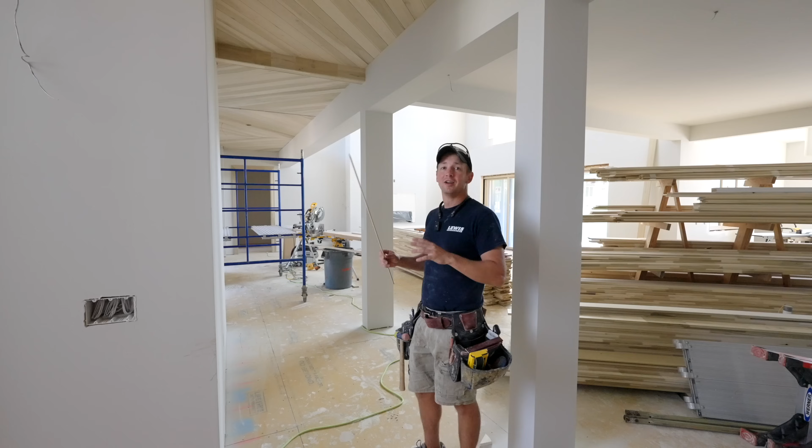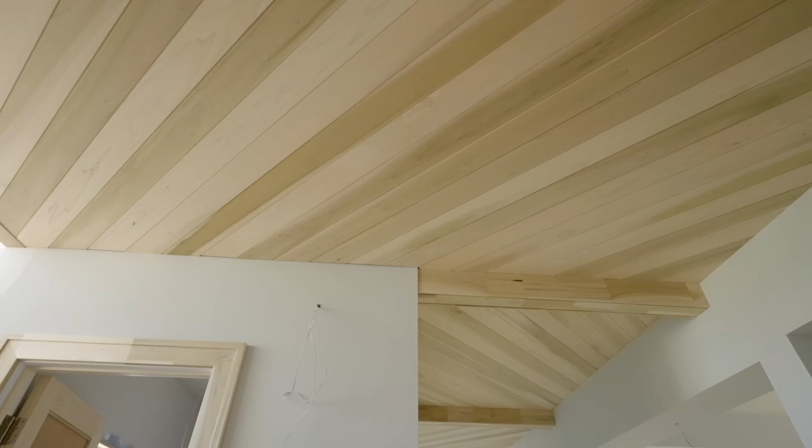For a lot of you guys who do this professionally, you know that details can take absolutely forever, especially those very simple contemporary details. I've got this long foyer here, and we've got nickel gap tongue and groove going on the ceiling, and you'll notice about every 8 feet it changes directions, and it's all cut at a 45-degree angle. I've actually been kind of dreading this aspect of the project for months because I thought I was going to have to fit every piece perfectly tight to the wall and not use any scribe molding.

Thankfully, I was able to talk the architectural designer into using this. So I'm partway through now. I've got a lot of tips and tricks that I've used on this installation that I want to show you.

First off, I want to address the question I get asked a lot whenever I use the term nickel gap. This is actually what we call nickel gap. It's different from shiplap. The profile is a little bit different. Some of you might remember a couple summers ago, I actually did a house with 2 miles of nickel gap just down the street here. So this is the same profile, same material, except it's stain grade and it's in poplar.

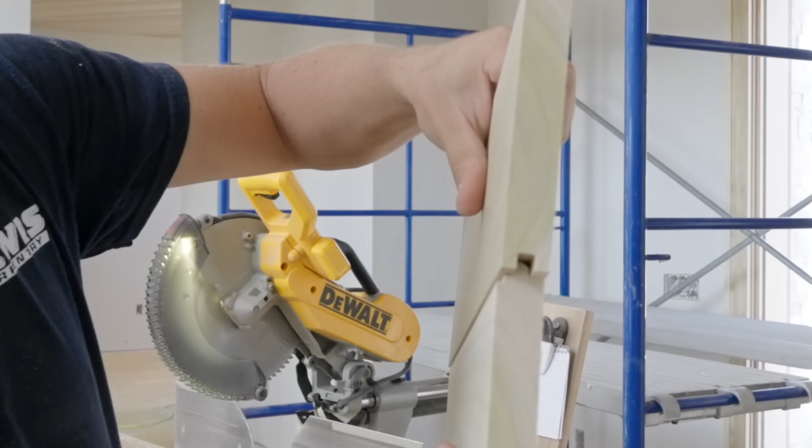The biggest difference with nickel gap is it's got a tongue and groove, and then you'll notice on the front here, you've got a gap that's a little bit thicker than a nickel, and that's why they call it nickel gap. It's a little bit different from shiplap. Shiplap actually has a rabbet on the ends and it overlaps, which requires you to face nail it. With nickel gap, when you're nailing this on the wall, you just nail through the tongue, and whenever you put your next piece on, it covers up your nail hole so you have no exposed fasteners.

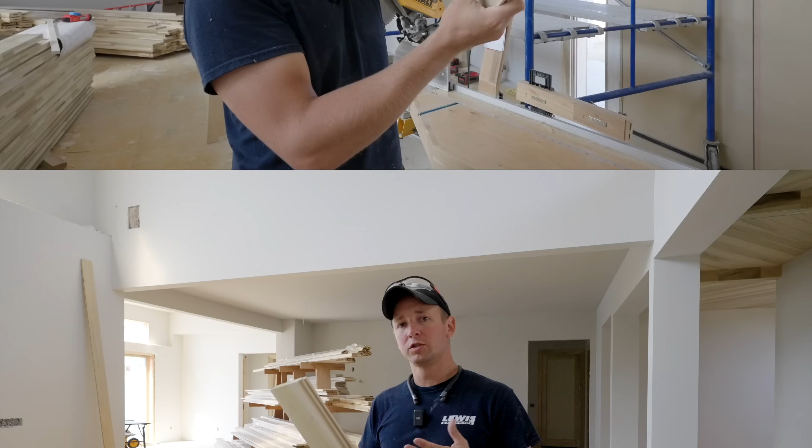So before these big projects, I always submit a quote or a bid for the job with what it's going to cost. And it's a big deal for me to try to do this work in as cost-effective way as possible. And sometimes the simplest details can add a ton of time to the project.

About a week ago, we were on site and one of the designers wanted to take all of this nickel gap and pre-stain it. The reason being, if it expanded or contracted, we didn't want to have basically raw wood showing through. So I actually nixed that idea.

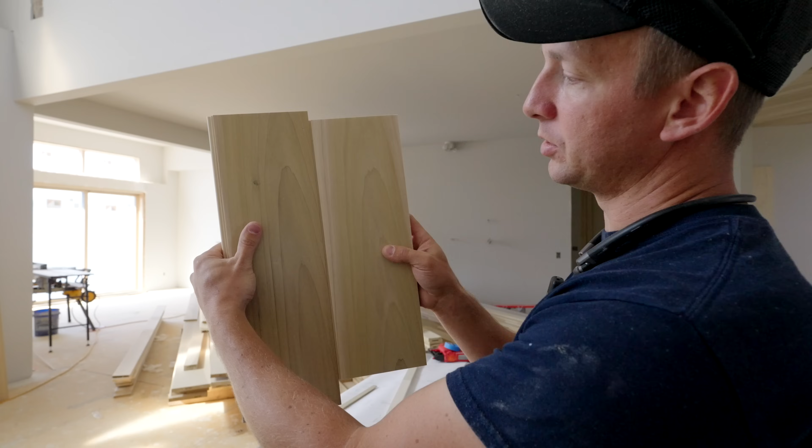The reason was we've actually got this house completely acclimated. The wood's been in here for a while. And if you look at the way this goes together, it's only going to, at most, expand or contract probably a 32nd. And that's just going to create a shadow line. We're not going to have raw wood, in my opinion. So we didn't do that.

That saved me a ton of time. Otherwise, we would have had to have had the painter come in, pre-stain all these grooves, and it just would have made the whole process a lot more difficult.

Whenever I have to bid these jobs and I've got a ton of cutting, a ton of pieces to install, the first question I ask myself is, am I going to be able to batch cut these pieces? Meaning, am I going to be able to set up a stop block and just cut a bunch of pieces at once to the same length and install them? Because that's going to greatly affect my labor.

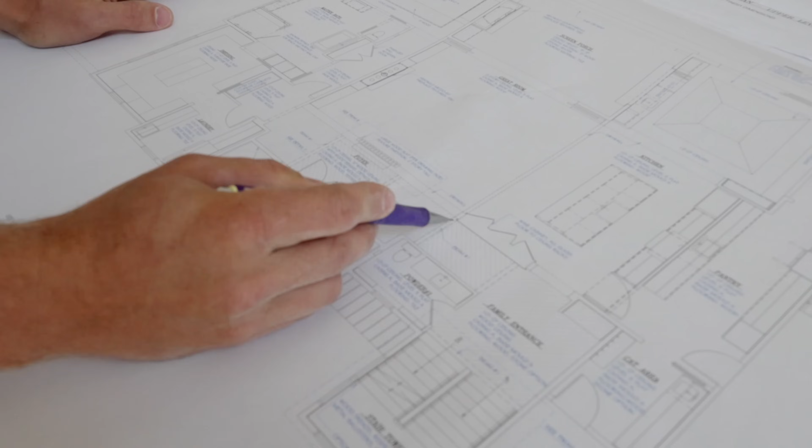If I have to measure and cut every single piece, it's going to take a lot longer. And if I have to measure and cut every single piece and have to tweak some cuts, make recuts and things like that, then it's really going to take a lot longer from a labor perspective. So when I was looking at this print, I knew that this had the potential to take a ton of time because all of these pieces are intersecting with the wall at a 45-degree angle.

So long story short, we were having a conversation a week ago going over the details for this ceiling, and I try to be respectful, but sometimes I have to push back a little bit whenever I realize that I can save a lot of money with a simple detail.

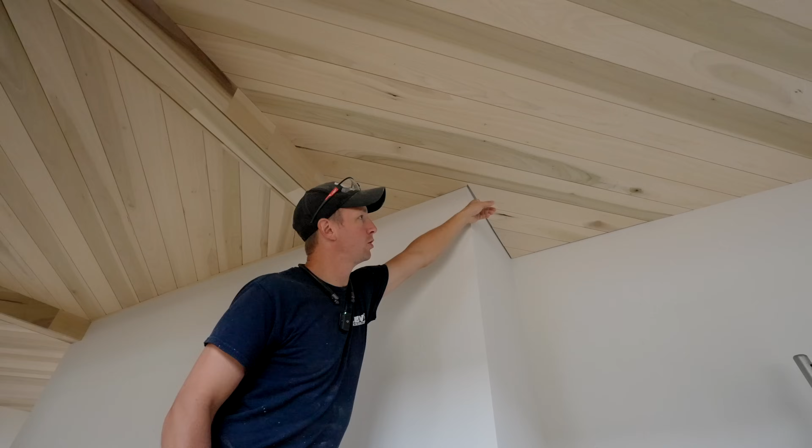So this is a piece of scribe molding, very basic, about a strong 1/8 inch thick, and this guy right here saved thousands of dollars of labor just on this area. The reason is it allowed me to have the ability to batch cut these pieces and not have it be crucial if I'm not getting everything nice and tight, so I can cut really fast and then I'll go back through and install a piece of scribe molding later.

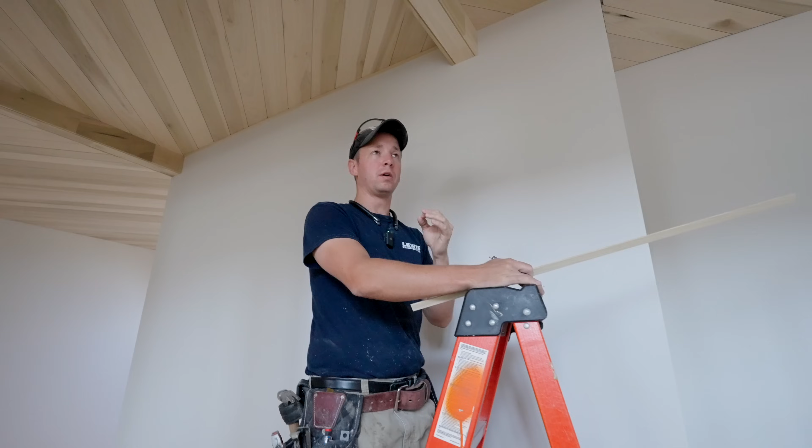If we actually come over here, you'll notice in this area I've already got the Scribe mold installed and it looks fantastic. So by not having to perfectly measure and cut every single piece, it saved tons and tons of hours of labor. So batch cutting is going to save a ton of money, a ton of labor, right?

Well, how in the world are we going to batch cut these pieces if they're running diagonally at a 45-degree angle? It's actually really simple, let me show you how that works. I was able to cut basically a whole section at a time like this without coming back up to measure anything.

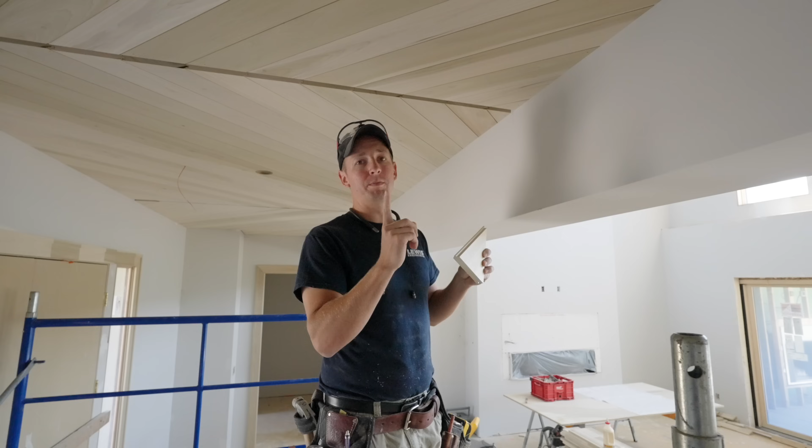To get started batch cutting, all we need is one measurement to start off with. So we're going to pretend a little bit that I'm starting here, that this isn't already up. We're going to start at the corner and work our way out. So I've got my starting piece right here. Now we can start batch cutting.

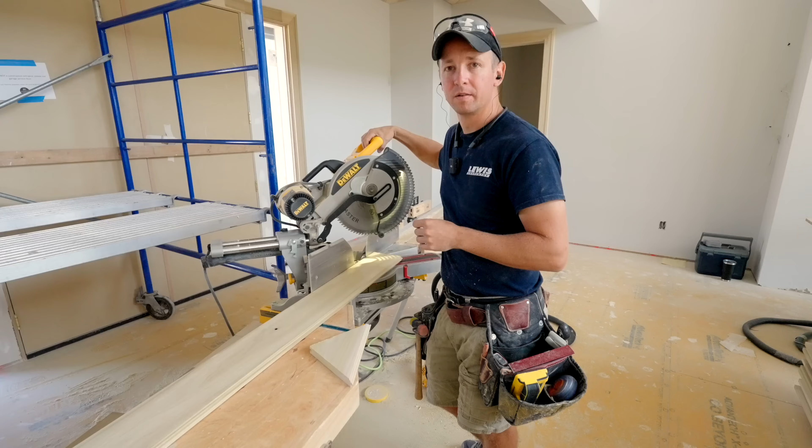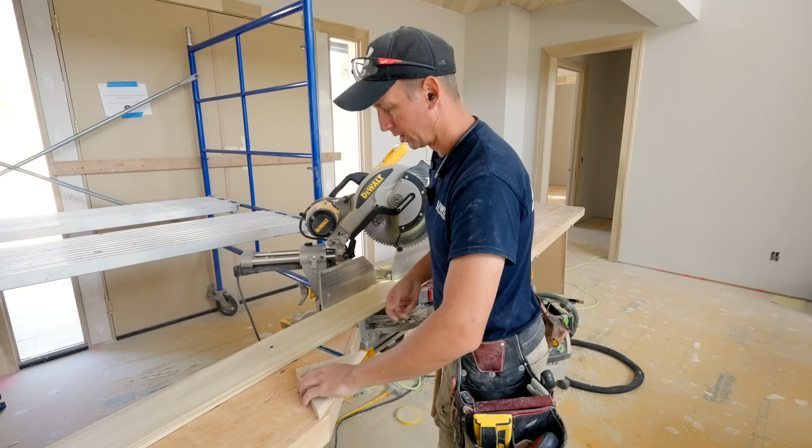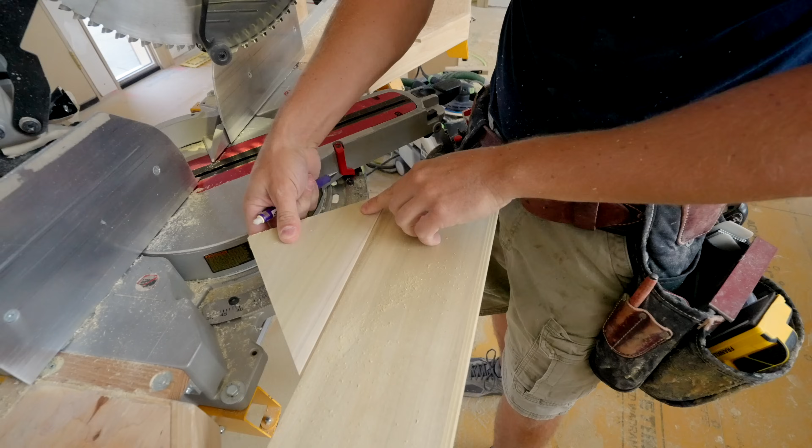So we'll get started by pre-cutting a 45 on one end. Now we'll take our piece that we're starting with and put it in line here on one side. So that's in line. And the nice thing is we've got forgiveness because we're going to use our piece of Scribe molding, and I'll make a line right there. Now I can come over here on this side and we'll batch cut the second piece.

Okay, so now our second piece is done. Now it's time for our third piece. I don't even need to move the saw, I'll just flip the board over. Get that one started. Now I'll grab my second piece.

Do the same thing again. Line it up right there. We'll come over here to the long point and then the short point on our next board. Mark that again. Cut that. One more. Flip. Line it up. Mark it.

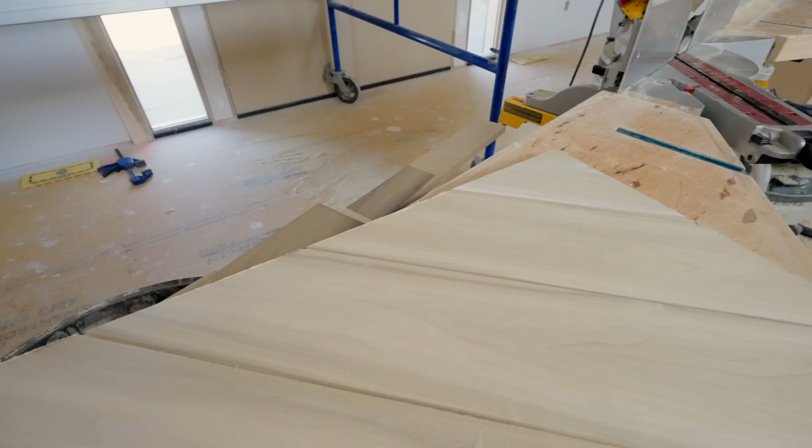There we go. So here we go then. I've got my starting piece here, piece number 2, piece number 3, and piece number 4. Everything's lined up. Again, thankfully we will be able to use the piece of Scribe molding over the end here, so if we're not absolutely perfect, it's no big deal.

But this is absolutely crucial if you want to get something like this done efficiently - to be able to batch cut, number one, but then also to have that measure of forgiveness by using a piece of Scribe molding. I've got nothing against trying to fit something like this perfectly tight. I can do that if somebody wants to pay for it, but we have to educate the client, the designer, the builder, and let them know that if we want to do it that way, it's going to cost a lot more.

So each of these boxes has about 25 pieces. Whenever I price out a job like this, I've learned to count the number of pieces it's going to take, and I know approximately how long it's going to take me to install - to cut, measure, and install a piece onto the ceiling - if I can batch cut and there's some degree of flexibility with the measurement. Usually I can count on about 10 minutes per piece, just as a general rule.

Now, if you take an install like this and I have to precisely cut every single piece, measure it and cut it, it's going to double the labor. So it's not a matter of, can a client like this afford to pay me to do that? Of course they can. It's more of a question of, can we take that labor and put it into another detail so they're getting more for their money?

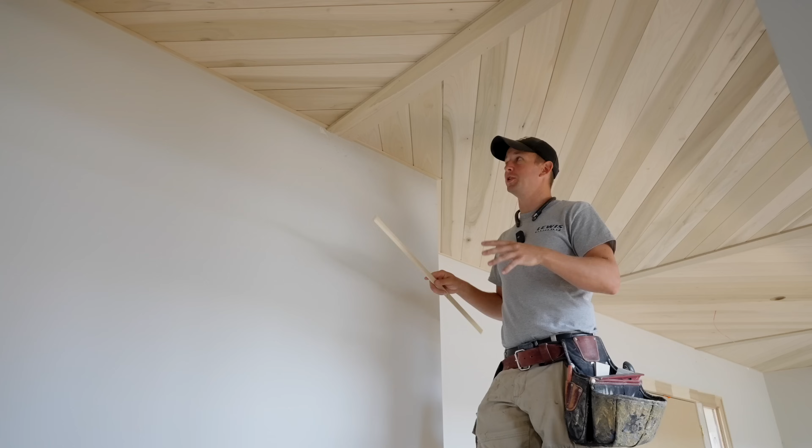Hey guys, we're actually a couple days forward in the future right now, and you'll notice the beams are no longer here. A series of events transpired that caused the beams to be removed. I'll cover that more towards the end of the video, but there was one more thing I forgot to mention before when we shot this the other day.

This scribe molding, there were a variety of reasons I pitched this, that we wanted this, and I forgot to mention a key point: it gives you a perfectly straight edge for the painter to cut his paint to. If you don't have that, you have all these little notches in the nickel gap, and whenever it's stain grade, it's really hard for the painter to cut a line and get a nice looking transition between the wall and the nickel gap. So putting that scribe molding on there gives you a nice straight line to cut to.

All right, enough talking about how to efficiently do this—let's get to cutting some wood. These are some beams, and these are breaking up the sections where the direction changes on this shiplap. We've got this broken up into sections. You'll notice over here I've got a lot of forgiveness underneath these beams, so that's another thing that helped me be able to production cut all these pieces really quickly.

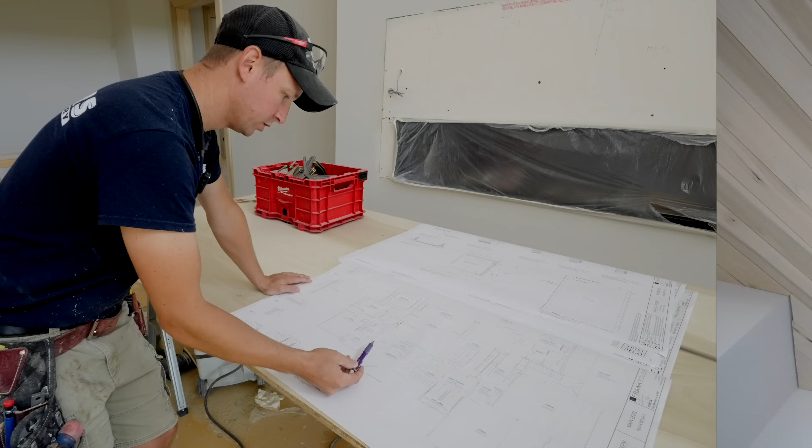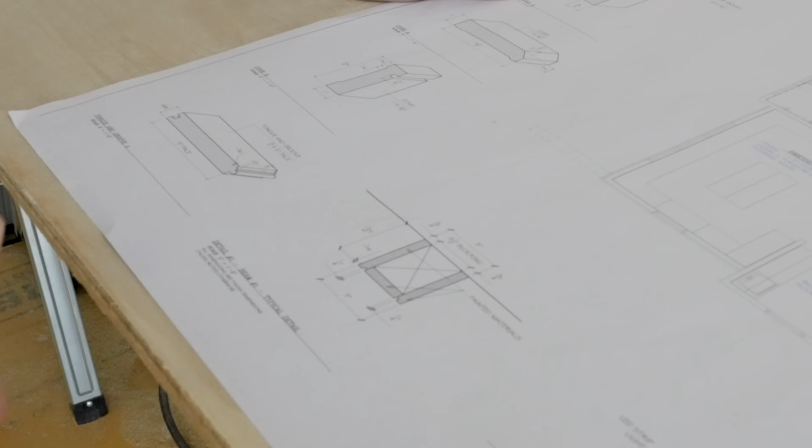So you'll notice here in our foyer area, it's got our diagonal nickel gap noted, and then there are four beams—1, 2, 3, 4. Down here they've got the specs on what I'm supposed to do for those beams. We've got a 1/4 inch rabbet detail on the bottom here, and the beam is assembled flush across the bottom. So I'll just be taking a piece of 3/4 by 3/4 blocking and putting it on here, and that'll allow me to nail this centerpiece up into the side beams.

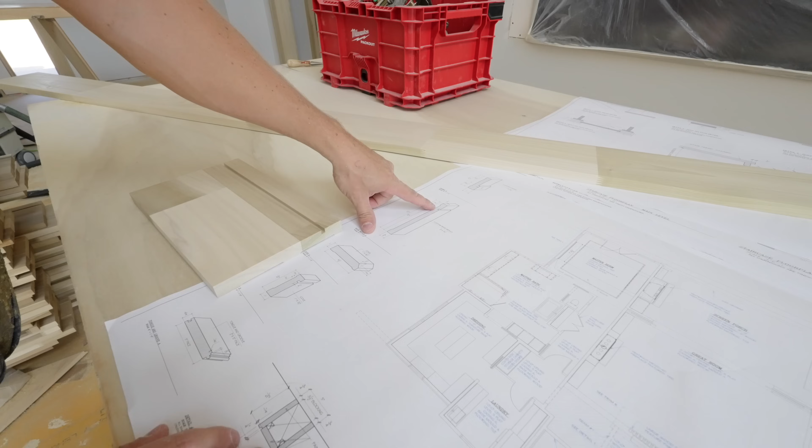The reason we have this rabbet detail on our beams is because it actually matches the baseboard. This is our baseboard, and it's got a 1/4 inch by 1/4 inch dado on here. So if we come down here and look at the print, you'll see up here I've got my baseboard profile with the dado detail, and then down here on my beam detail, it's actually a rabbet, but it still looks like that same dado that I have on my baseboard.

Getting set up to make these beams, I'll need to make a rabbet on one edge of the beam. To do that, I use this little fence that attaches to the DeWalt compact router. I keep this on my van all the time—I actually use it quite often. And then I've just got a mortising bit chucked into the router.

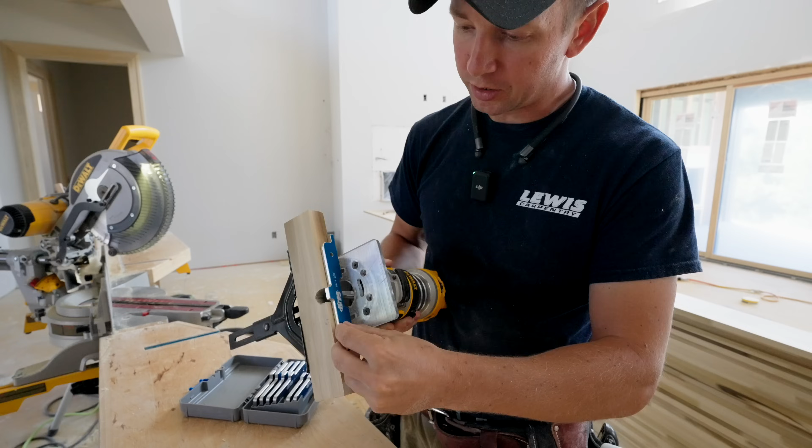I'll take a gauge block, and I want a 1/4 inch by 1/4 inch rabbet. So I'll set my offset there at a 1/4 inch, and then it's pretty handy because you can just flip it over and set your bit depth at a 1/4 inch as well.

I've got some pieces pre-cut a little bit longer than what I know I'm gonna need. Whenever I select these, I need to make sure I'm accounting for any defects in the material. So I'm grabbing it, I'm looking at it—if I've got any chunks out of any of the edges, I want that hidden. Also, a lot of times you'll have some planer chatter on one side of the board, and it's not gonna sand out quite as easy, so I want to make sure I'm putting that side towards the inside of the beam. So this is my good side—I'm gonna flip it over. This is gonna be my inside, and I'll be running the rabbet detail on the inside here.

So I've got these positioned with the inside, ugly side facing up. I can grab my router and go ahead and put this rabbet on the edge. Whenever you're gonna be taking a 1/4 inch by 1/4 inch rabbet out, you want to do that with a climb cut, otherwise you risk taking a chunk of material out. So I want the bit going clockwise into the material—that way the bit's pulling the wood in and it's not gonna rip a chunk off. So we'll go clockwise with the bit down and then push it back, and that'll give us a really good cut.

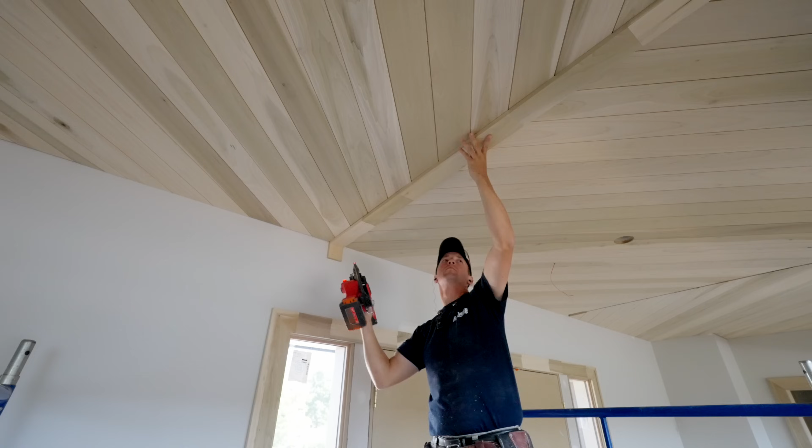So to get the measurements for our side beams, there's a lot of different ways we could get these cut. I just grabbed my stair gauges here because a lot of times the drywall is tapered and has different things going on, and this is going to make it really easy to get the length and the angle of the cut perfect all in one shot.

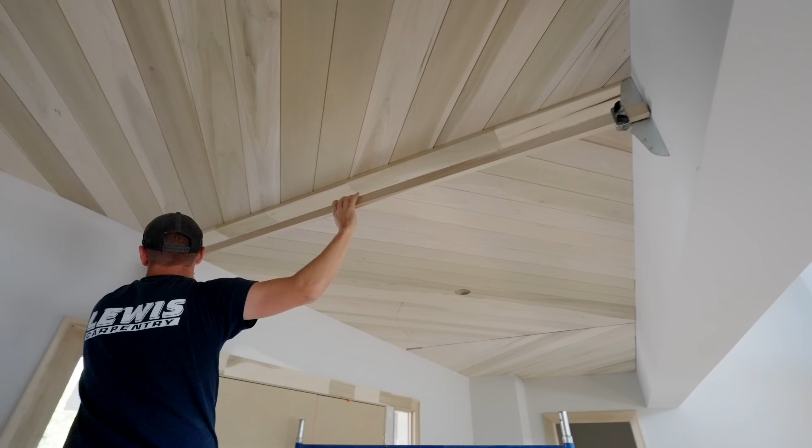So to do that, I'll just take this up here, slide it into place, and then loosen these, push it in really firmly, and tighten them up, and that'll conform to the angle of the drywall. We'll go ahead and do that on both sides. I think this one's gonna be good. Nope, go ahead and move that as well. Again, pushing nice and hard. Looks good there.

Looks good here, so I can use this to cut my side pieces now. While I was up there, I didn't show it, but I always try to mark an R or an L on either side to keep straight which side is left and right so I don't get it flipped around. So we'll align the top of the gauge, which is the ceiling, and mark that, then carefully go down to the other end, trying to make sure I don't move it, and mark that as well.

So I want to match up my shadow line from my blade onto the pencil mark, and you'll also see I've got my two pieces stacked on top of each other. I'm going to cut these at the same time and just be careful not to move them.

So that looked pretty good. Now I'm going to be careful to squeeze this together and slide it down. Cut. It's probably getting a little long.

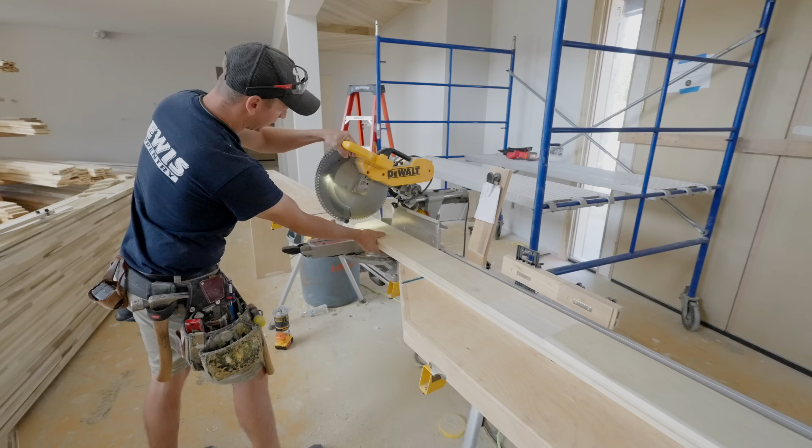All right, so next I want to match the angle of the saw to that pencil line, but before I cut these, I want to just feel down there and make sure that those are still flush. And they are, so I'll go ahead and cut this.

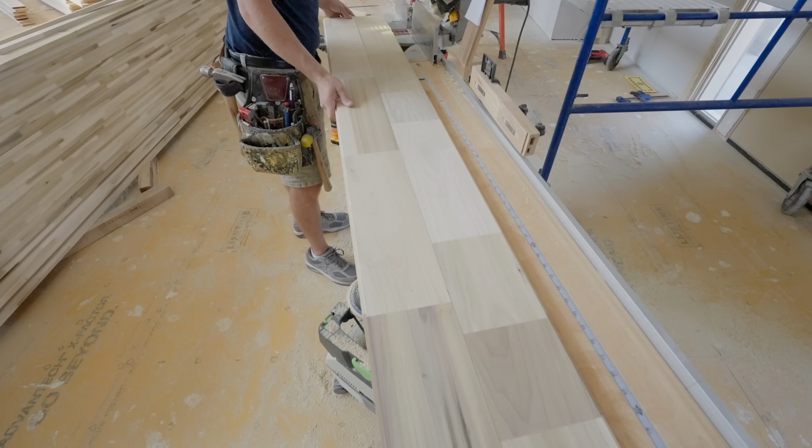Now I can tell you that unfortunately one of these has a bow in it, and I think they're actually going the opposite directions because I wasn't paying attention to that. I can figure that out by flipping this over and putting them together, and actually they're decently straight. Nothing too bad there, so we should be fine whenever we put these up on the ceilings.

These are about 7 foot long, so I'll probably still have to scribe them to the ceiling. This is one of those things where do as I say, not as I do comes into play. You'll notice we just don't have a lot of room in here with all this trim.

Our table saw ended up right here, and there's a very expensive patio door behind it, which is not a good idea. So I've actually been opening up this glass door whenever I want to rip stuff. You don't want to have glass like this behind your table saw. We'll get this moved here soon, but for now, I just kind of have to have it right here.

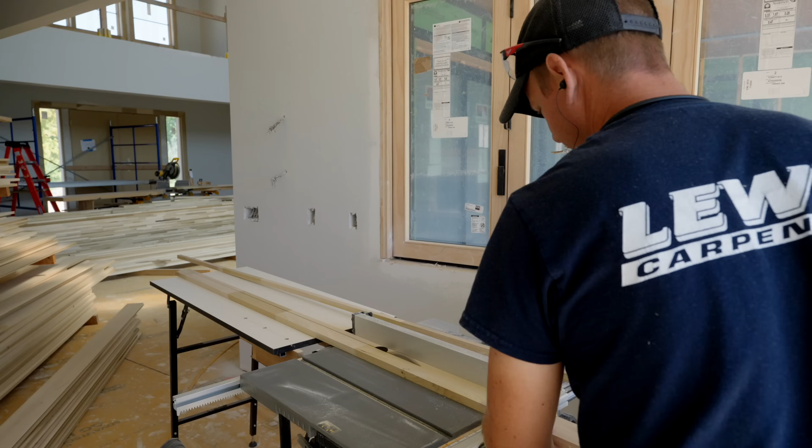Even when I'm doing paint grade work, it's still very important to sand stuff. A 5mm stroke on this ETS 150 makes quick work on poplar.

Now, if we get up close here, you'll notice that we've got some very sharp edges with some splintering going on. That's not great if you want a really good paint job. You just want to take a piece of sandpaper, 120 grit, and just soften those edges real quick. Doesn't take long, but makes all the difference in the world for the final finished product.

The next thing we're going to do is put some blocking on the inside of these sides of the beam. The reason for that is we want this bottom piece to come across perfectly flush whenever we install it. To do this, we'll just use a 3/4 by 3/4 nailer piece that we'll nail on here. I do like to glue this in. It's probably not necessary, but it just ensures that things aren't going to move around, and maybe we won't get some paint cracks and stuff like that.

So just a little bit of glue, smooth it off with my finger. I want to make sure that I'm in 1 inch on both ends so that I don't run into my blocking that I've got up on the wall. And then I just create a little gauge block here that I'll use to get this in the perfect position.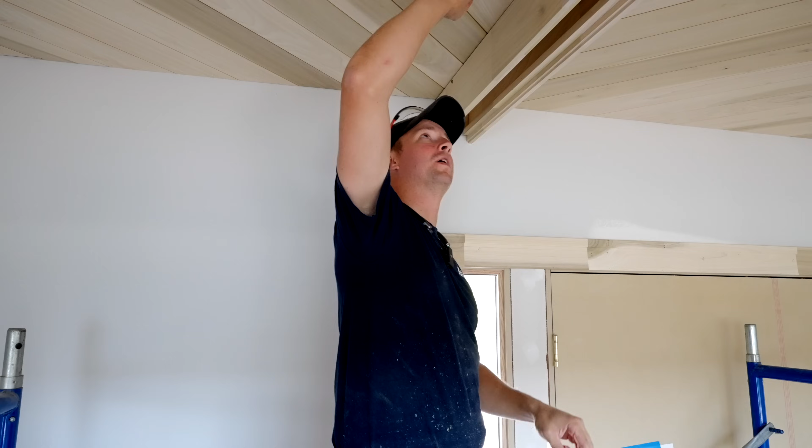All right guys, so you always hope you won't have to scribe it, but you end up always having to scribe it. Got these up there, there was kind of a hump in the ceiling. So the biggest key is you want to get it in position, tack it in place, and make sure your ends are level across. That way, whenever you scribe both sides, you're taking the exact same amount off of both sides, and it goes up the same on both sides and stays level.

So I'm just using my easy scribe, going to do a pencil line on here, and probably rip this off on the table saw. Just go along there, like so.

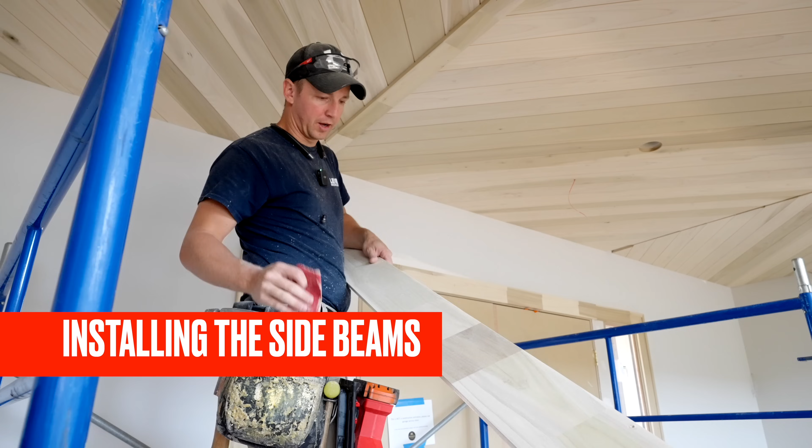Not a big deal, go to the other side. Alright, so I've got my scribe cut, and then I went ahead and softened that top edge. I like to do that whenever I'm mating a painted material up to a stained material so I don't have that super sharp edge. So now we'll just kind of go in at an angle here.

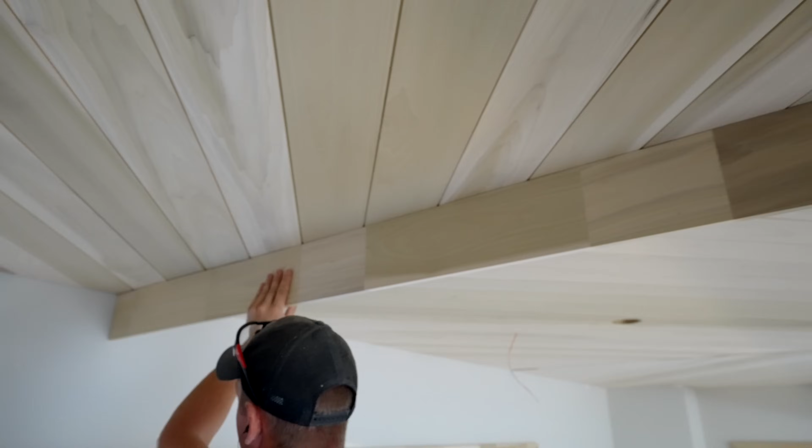Hopefully everything looks good. Nail it in the center. Then I'm just going to put a nail on both ends. I'll come around and do the same thing on the other side as well. Trying not to damage the drywall too much, slinging stuff around here.

Now I just need to get the measurement for my bottom piece here. I'm going to take my laser - I'll try and remember to link this in the notes, it's the Leica Disto D2. I got 83 7/8 strong.

So a little tip, whenever you're fitting parts of, basically the center part of a beam in, I like to ease the edges real nice. That way it'll slip up into place a lot easier than if you leave sharp edges.

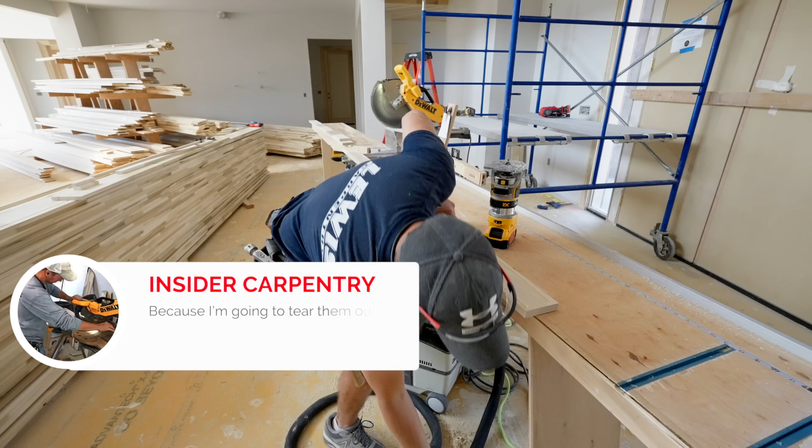So at this point, we're ready to install this. I'm going to go ahead and put a little bit of glue down both sides just so everything stays connected really well after I nail it in place. Because it is paint grade, that glue line is going to want to crack way up in that rabbet. You won't really see it, but the glue will probably help combat that cracking a little bit.

So just going to smooth that out. We'll go ahead and nail this in place. Okay, up we go. Hopefully I got my length right. Ooh, that's a little tight. Our drywall tapers down, I think, right there. So I'm going to switch ends and try and put this end in first. It might go in a little bit easier, yep.

So basically what was happening right there is this corner bead was tilted out, so it wasn't allowing it to go in. So that looks really good. Don't even need to clamp it together, you can just squeeze it together by hand, make sure it's pushed all the way up.

And I'll add a couple 15 gauge nails just to nail it home completely. Nailing here on that blocking that I had will squeeze this together. Out of nails. So guys, we're all done with this beam. It finishes off really nice and flat all the way across the bottom here.

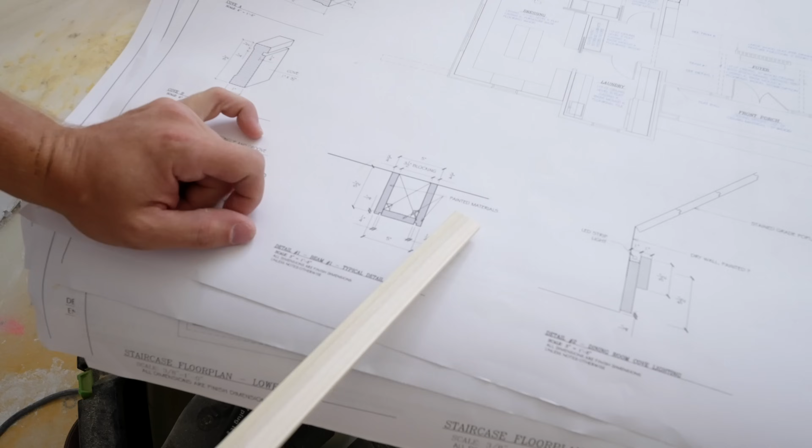And so the first thing I did the next morning, I came in here and ripped them out and was planning on putting stain grade beams in. Homeowner ended up wanting a different look anyways. But if we go over to the print over here, I was telling cameraman Aaron about my situation the next day, and he said, well, the print did say they were supposed to be painted. So if you look down here, we've got our beam detail right here, and you'll see that it says painted materials.

So I ended up being off the hook on that. Wasn't my screw up after all, still going to get paid for doing it, but it's just one of those things that happens in construction. So I'm happy with how it looks now. I think it looks great either way, but a little bit of drama on this one. So hope you guys have enjoyed the video. I'm going to keep rocking and rolling. I've got a lot of this scribe molding to trim out around this room, but it's looking absolutely fantastic. Let me know if you've got any questions in the comments. We'll have a lot more videos coming from this house, so stay tuned.